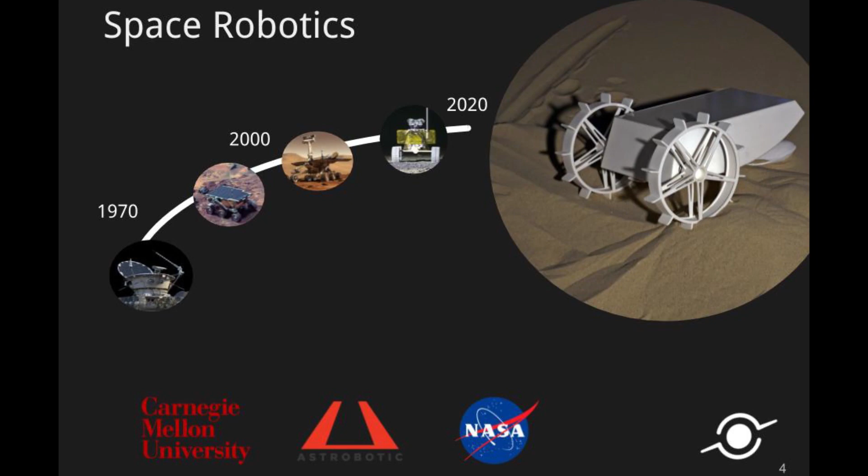So that's what Cuberover is for. It's a 2-kilogram rover that should be much more accessible to other universities and scientific bodies that want to be able to do science on the moon. And the Peregrine lander that you saw there is the delivery mechanism for that. This is analogous to the way that CubeSats have democratized access to universities and places like that for doing science in orbit.

And the difference between us and others that have come before is primarily that mass, which is what makes it so economical. But what we're demonstrating in this particular phase 1 is that we still can do science, useful science for people on the moon with that 2 kilograms.

I think more fundamentally, there's this really basic question about whether a 2-kilogram rover works at all. This is a profound challenge. It's not foregone. We're going to see in an hour whether anybody really believes it.

So the way that we're going to look at that is through a few different phases of the mission that it needs to be able to accomplish in this 2 kilograms to be a 2-kilogram rover. One is that it needs to get to the moon, right? So it has to launch, it has to survive the launch loading, it has to survive the transit to the moon, which in particular gets very cold, and it has to survive that drop deployment that you saw from the bottom of the lander, and it needs to actually rove around the moon. So those are the phases that you'll hear our different subsystems explain.

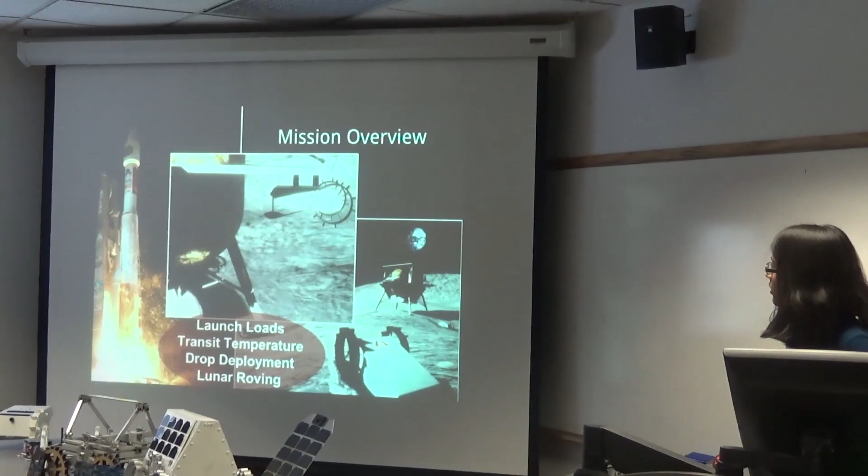On a broader level, there's a variety of different subsystems to this rover that you'll see. At a system level, we have an overarching group whose job is to manage the budgets and the margins between these two groups so that we actually produce a rover that can work on the moon. Those budgets are mass, which you'll see now, power and thermal, which will be discussed, and then the money itself. And we're ensuring staying on that schedule for the launch for phase 2 and coordinating between these subsystems.

To give you an idea of what else the systems team does, we're in charge of navigating the high-level requirements all the way down to the low-level subsystem requirements. It's a multi-tiered approach: you start with objective levels, which is the goal of the entire Cuberover program, then mission levels, basically rover launch operations, then systems, like the mechanical team, thermal team, avionics, science systems, and finally subsystem teams.

To give an example of what requirements for each tier looks like, we'll look at mobility. On the objective level, the Cuberover is supposed to provide power, mobility, and communications to a science payload—basically the Cuberover has to be able to do science. On the mission level, the Cuberover shall be able to move a certain distance.

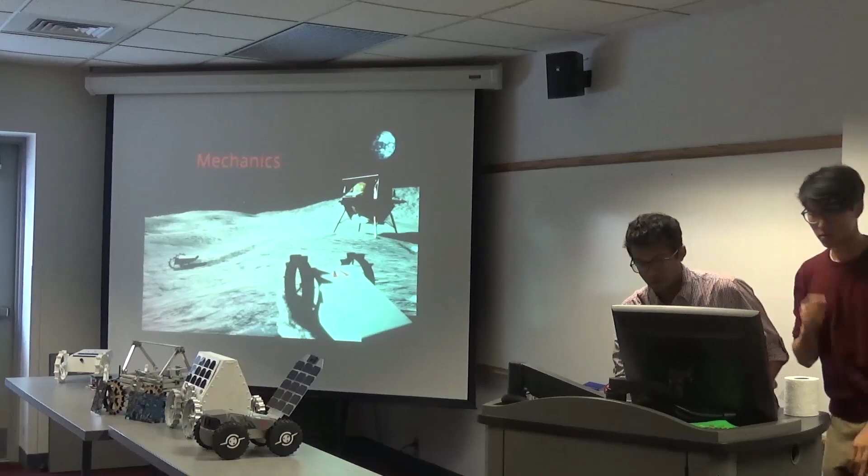For the Cuberover system, we wanted a simple yet robust design. We did a trade study on whether to have 2 wheels or 4, and since 3 points of contact is the minimal required for a stable system, we ended up going with a 2-wheel tail dragger. For mobility, we have 2 independently powered wheels, so to turn, one wheel would be turned at a different rate compared to the other.

For thermal, since heat transfer is either by conduction or radiation—there's no convection on the moon—the radiation would happen over the surface that's there, so we wanted to maximize the surface area to radiate heat out to space. For solar power, we need enough surface area to install solar panels so the sun can provide energy and we can recharge our batteries.

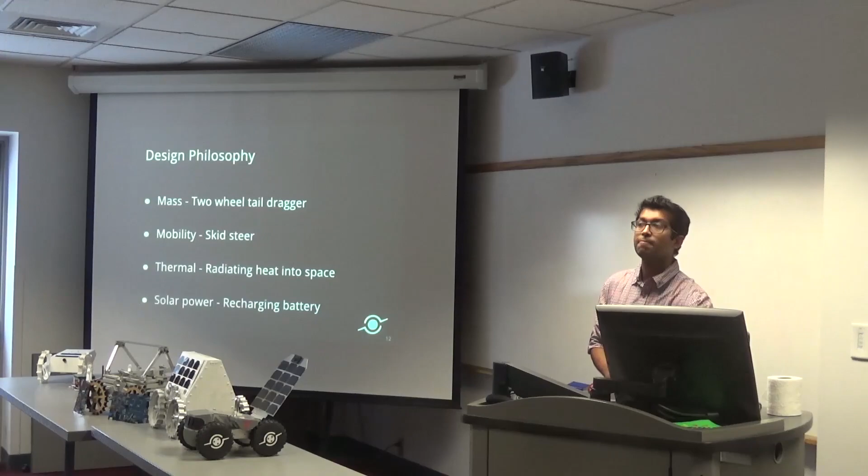Oleg: the primary philosophy behind designing the chassis for the rover is that it must be able to survive and thrive under the thermal environment of the lunar surface.

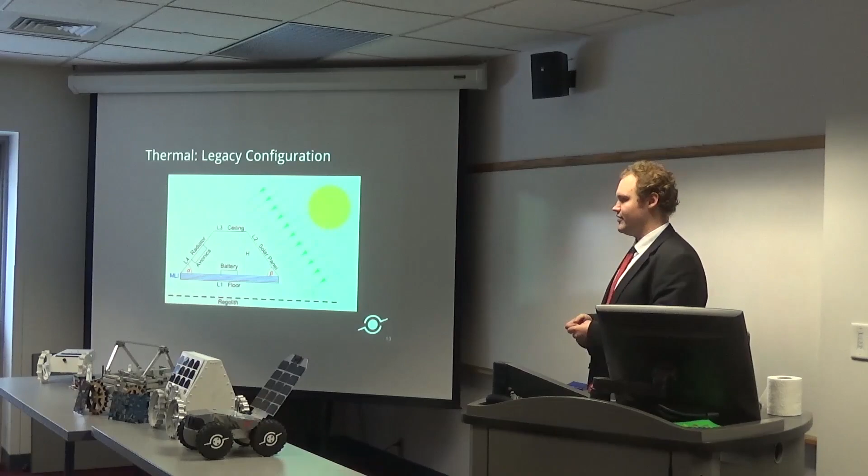In the legacy configuration developed in earlier semesters, we had originally envisioned a solar panel and a radiator facing opposite sides of the rover. That way the radiator would be protected from sunlight that would add heat, but it would be somewhat exposed to heat coming in from the regolith.

Under this condition we would have optimized our design to minimize the surface area of the ceiling. However, if we were able to increase the surface area of the ceiling, that would be the ideal location to place your avionics and declare it as your radiator.

When exploring the ideal configuration possible, under the idealized rover we would have a horizontal radiator that maximizes the view factor to open space and minimizes the view factor towards the hot regolith on the moon. Solar panels, if included, would ideally face away from the radiator so they don't re-radiate heat onto the radiator's surface and heat up the electronics bound to it.

We would like to isolate the thermal enclosure for avionics so that heat coming up from the regolith below the rover, and any heat collected onto the solar cells, is blocked out. This was the original concept for the idealized chassis configuration. This schematic shows the multi-layer insulation, which blocks out the majority of heat traveling through the floor and being collected by the solar panels, protecting the avionics in the upper section, which would be used only as an avionics containment box.

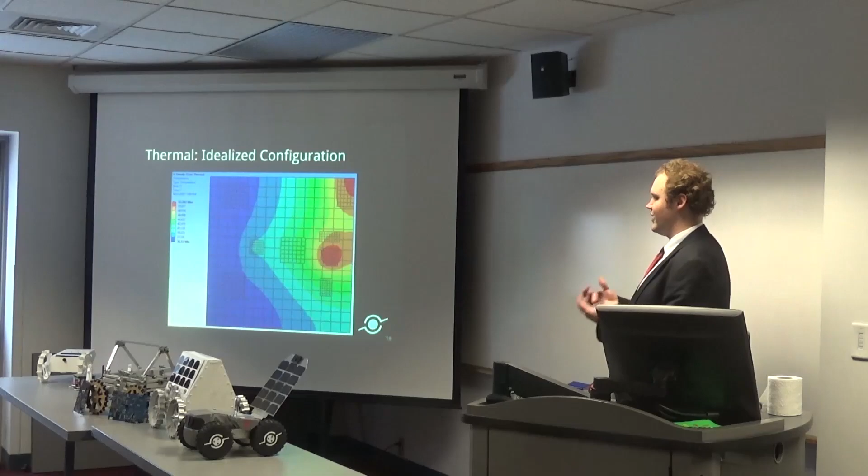If our maximum temperature limit for the chips was around 40 degrees Celsius, then we would not be able to operate at conditions of solar elevation around 45 degrees or higher. Using that, we predicted how the radiator and maximum chip temperature would depend on the power dumped into the avionics board by the complete set of electronics on the rover, and the angle of the sun above the horizon. This provides a cutoff for different modes of operation on the moon depending on how much power has to be dissipated by the radiator to open space.

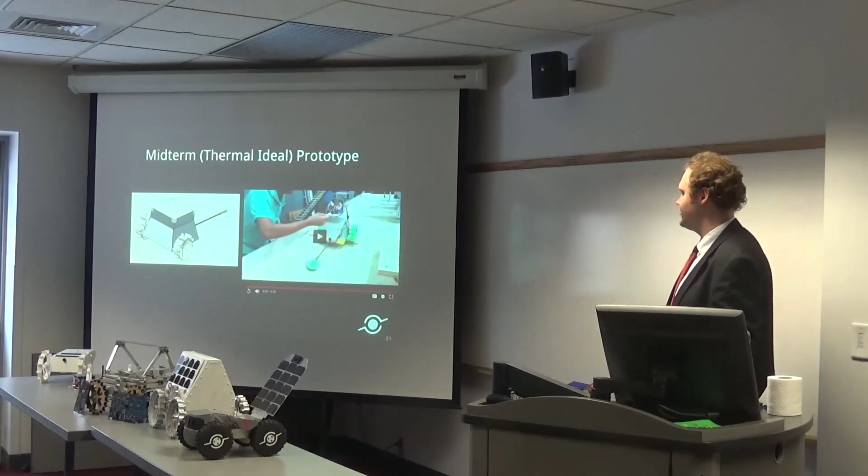The initial prototype, however, unfortunately resulted in too much weight, and there were issues with its ability to surmount obstacles. So when we continued development past the mid-semester prototype, we moved to a chassis with reduced mass, more optimized for climbing through very rough terrain.

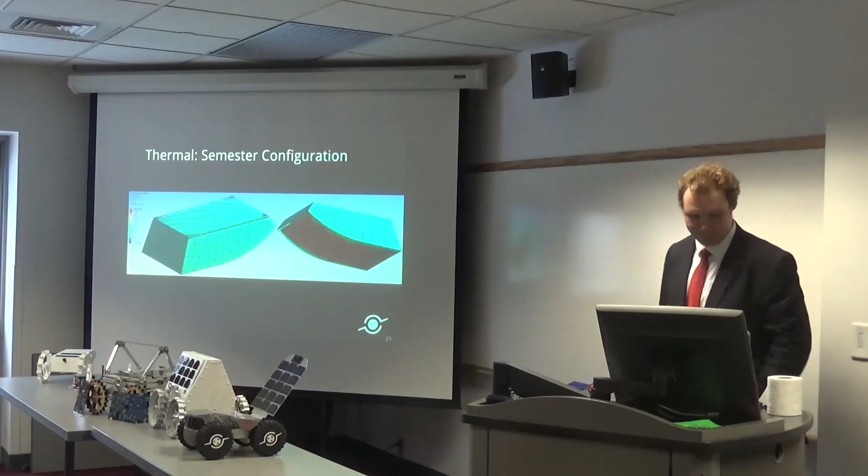Following the new chassis design, we ran simulations on ANSYS at ideal lunar conditions at a solar angle of 75 degrees. You can see the different heat signatures incident on the full body chassis of the rover.

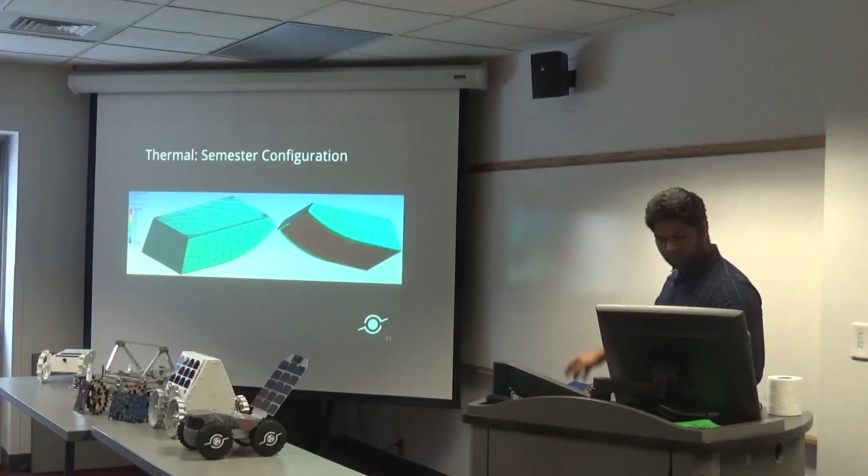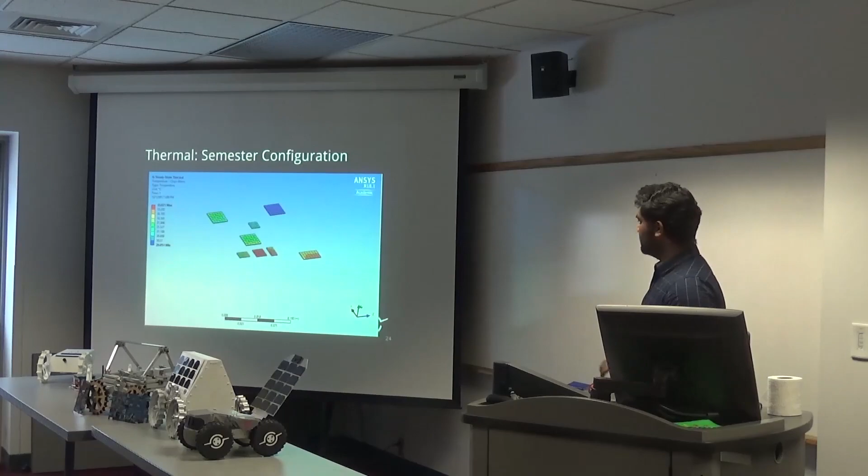The rover is only operable if the temperature of the radiator is between 0 and 40 degrees, so you can see the window there. At full power, the rover can be operated from about 28 degrees to about 85 degrees solar elevation and still be within range. At half power, the range moves to about 35 degrees to 85 degrees.

Quick question: when you say degrees, do you mean angle of elevation of the sun? Yes, sorry, angle of elevation of the sun. Another question: blue, is that idle or zero power on the CubeRover—what are the legends here? Blue is when everything is switched off, which would not happen at all, but we included it anyway.

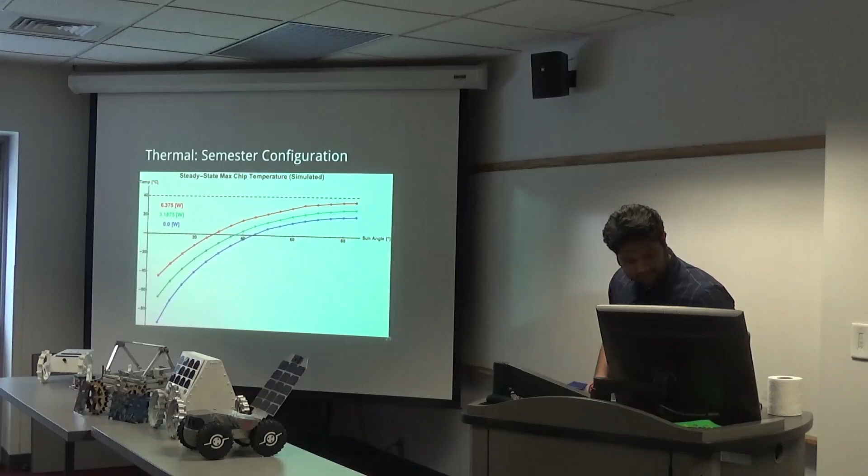This shows, at different solar angles, the maximum chip temperature experienced. You can see that at a solar elevation of 85 degrees, at both half and full power, we're still within range, so it would still work.

The limitations we faced with the current model are that we didn't provide a method for charging, like solar panels—if included, the heat inside the rover would increase. The second big limitation is that all simulations assumed perfectly flat lunar terrain, so we haven't accounted for rough terrain. If the rover is near large boulders, which are relatively hotter than space, the view factor of the rover toward the boulder would be higher and more heat would impinge on the rover.

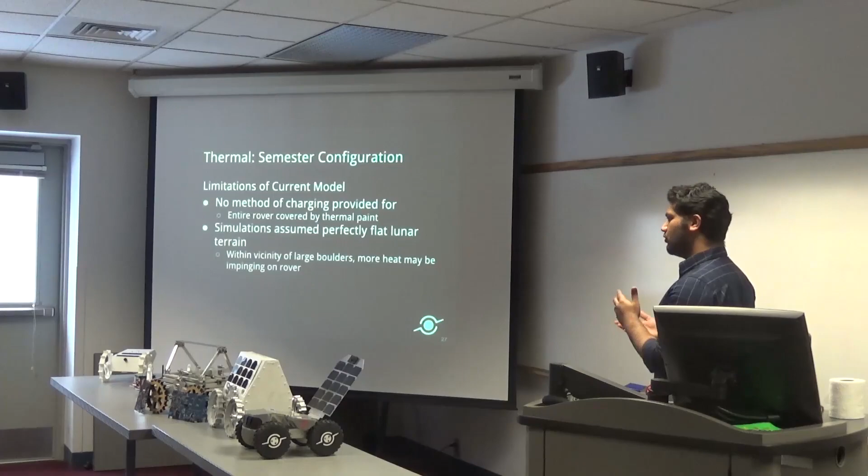If solar panels are included, the whole plot would shift upwards and the operation window would change. So though you would be able to operate the rover at lower solar angles of elevation, you would lose the ability to use it at higher angles.

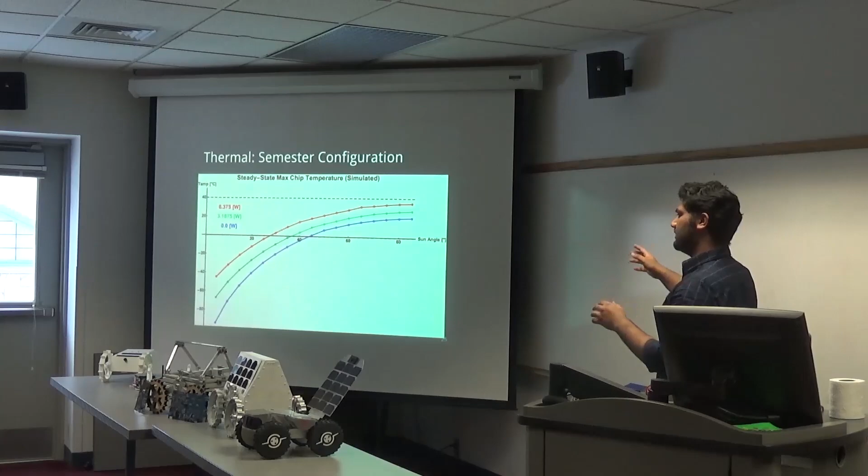Hannah's going to talk about the wheels.

Moving on to some of the component design, as with the majority of this rover, we are comparing and balancing some of the indicators of performance, in this case maximum surmountable obstacle and lateral flotation, against weight. Throughout this rover, we are often doing trade-offs between something that we predicted could perform better and something that needed to meet our weight standards.

So in terms of the wheels, we wanted to make them with the minimum possible diameter, minimum possible width, as light as possible, while still achieving our desired mobility standards.

Here you can see some data from a Chinese lunar exploration mission. This mission landed in one of the lunar maria. Maria comes from the Latin word for seas, and these are the planar regions of the moon, covering about 15% of the moon. They're called maria because early astronomers thought they were actually seas on the moon, because they're a little bit darker. But these are the flatter, more tame areas that have been the locations for most of the landings on the moon. This is where we hope to land with our rover.

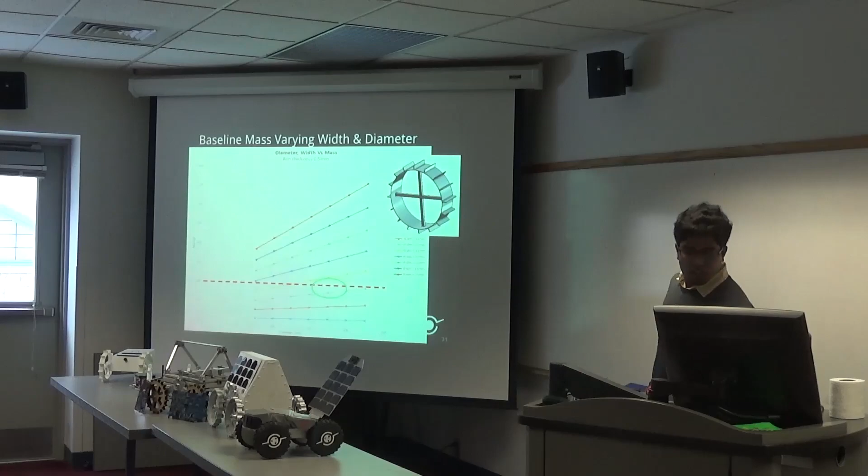We were aiming for a 100-gram weight for one wheel, and that's the green circle you'll see. Then we did another study for the same thing, keeping the diameter around double the obstacle height, and then we varied the width and the rim thickness. Based on these parametric studies, we decided on a width and a rim thickness.

As we improved the design, this was our first design with 4 spokes. You'll see every design being iterated based on these studies, but with different inside spoke designs and stuff like that. Then we did analysis throughout, whenever we developed a new wheel design.

What we did was a drop test, from 1 meter, on the lunar rover, and then we checked if it was safe or not, based on factor of safety. Then we did the same thing for mobility: if it stalls and the wheel gets stuck, what would happen to the wheel?

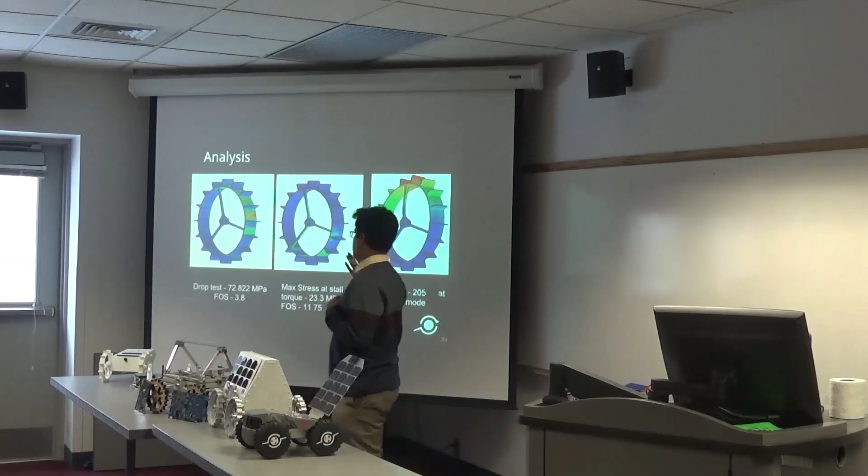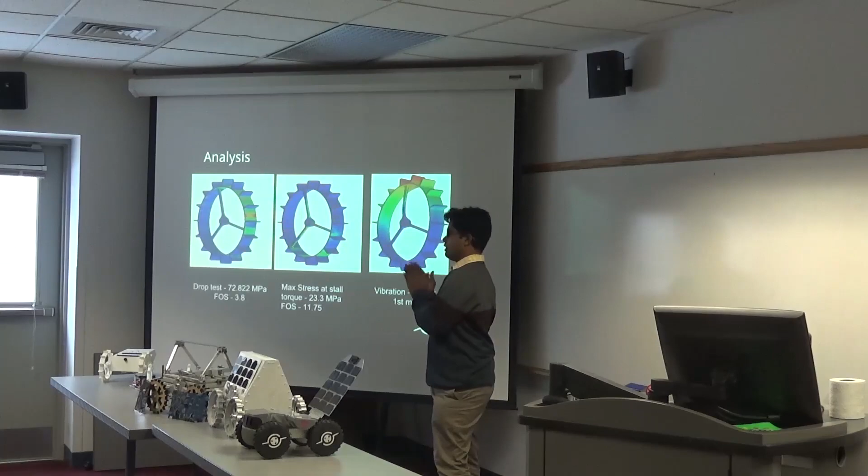So that's what you see in the middle, max stress, which again is a good FOS. For vibration, on the launch vehicle we checked that the envelope of frequencies was up to 100 hertz. So we took a factor of safety of 2, and then did vibe testing. The middle is fixed, and then 2 faces of the wheel are fixed, which is what we would need while it's attached to the rover, lunar pod, or vehicle.

Kushal will talk about the tail.

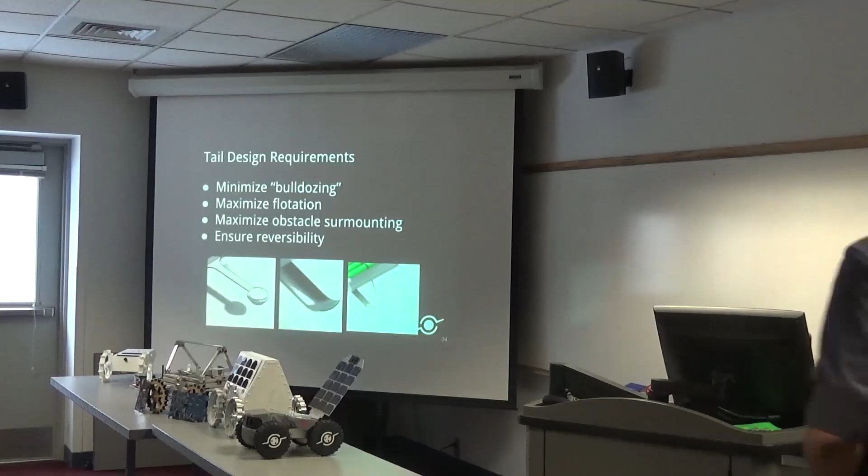So as we know we have a 2-wheel and tail system, designing the tail was part of the integral design, and there were parameters which influenced the structure, shape, and size of the tail. Our first goal was to minimize the bulldozing effect. The tail is the driven part - there are no motors connected to it, it just gets driven by the wheels in front. So we wanted to minimize bulldozing, thus reducing the resistance caused by the regolith.

Apart from that, we wanted to maximize flotation, meaning a higher area of contact with the regolith, which increases flotation. We also wanted the tail to easily surmount obstacles, because some previous designs had good flotation and bulldozing performance but weren't great at surmounting obstacles. We also wanted the tail to work well in reverse operations, since the Cuberover may have to go in reverse, and we didn't want the tail to sink into the regolith.

So in the 3 images at the bottom you can see the design iteration process, and now I'll talk about the final design of the tail and its features.

We start with the load-bearing strut at the very end. The maximum load coming onto the tail will be endured by the strut, and since materials are very good under compression, this takes the max amount of load. We've got a contact bulb designed to give a high surface area of contact, improving flotation. It has a lip at the end which helps with reversibility, and we've tried to make it as lightweight as possible.

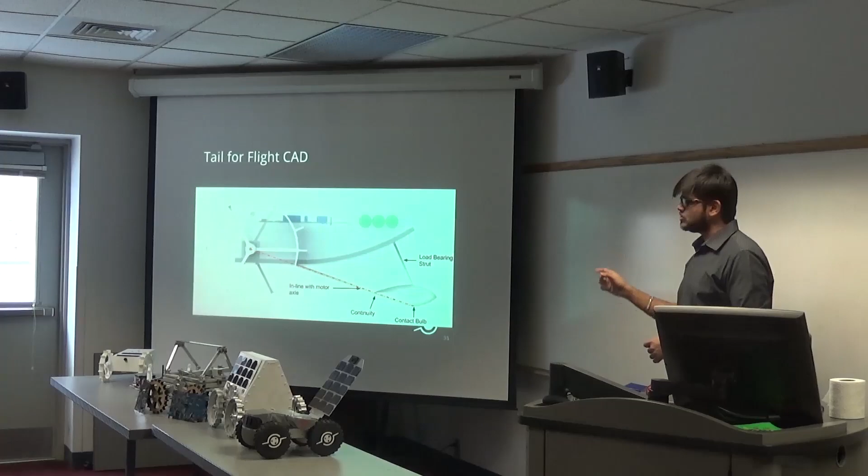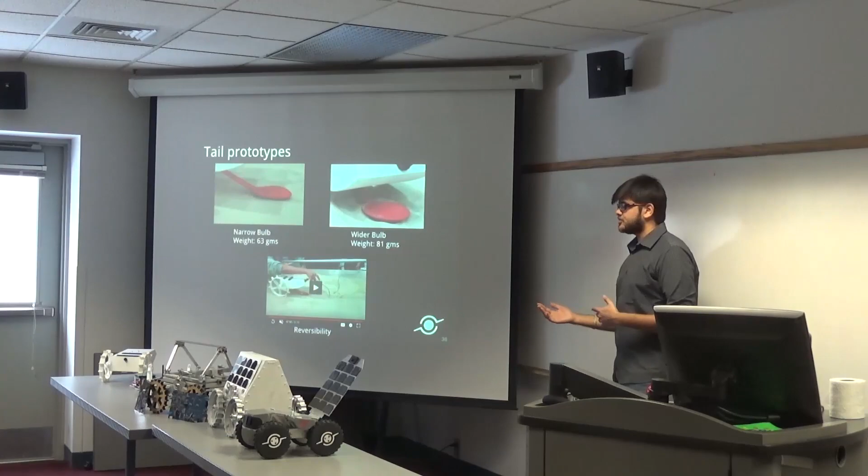We came up with 2 variations of the design, a narrow bulb and a wider bulb. At the bottom you see a video showing the reversibility of the tail, demonstrating it doesn't sink into the regolith. The two variations were to check whether increasing the surface area of contact significantly improves flotation and bulldozing performance, but the experimental tests were not very conclusive - this is an area for further study in future prototypes.

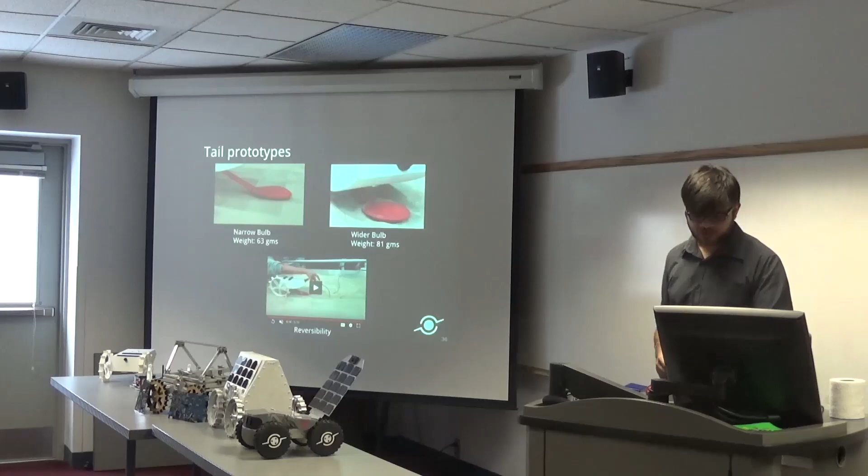As for the FEA analysis, we went with 3003 aluminum, considering it a better and more optimal choice for space grade aluminum over 6061. We did an initial vibe test to check the first natural frequency of the tail.

There were a number of possible maximum load conditions, and one of the loading conditions was that we have two fixed obstacles on either side of the tail, and the rover is trying to turn because the wheels are free to turn, but these obstacles are prohibiting the tail from turning. We checked whether the tail is strong enough to endure that type of loading situation.

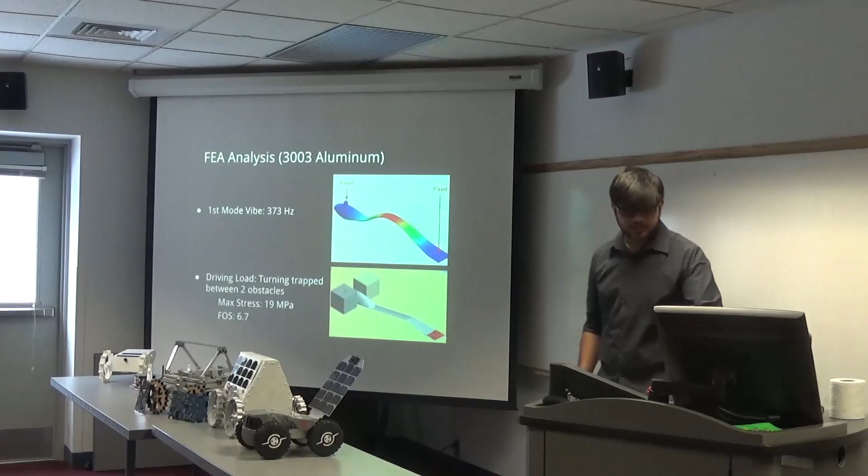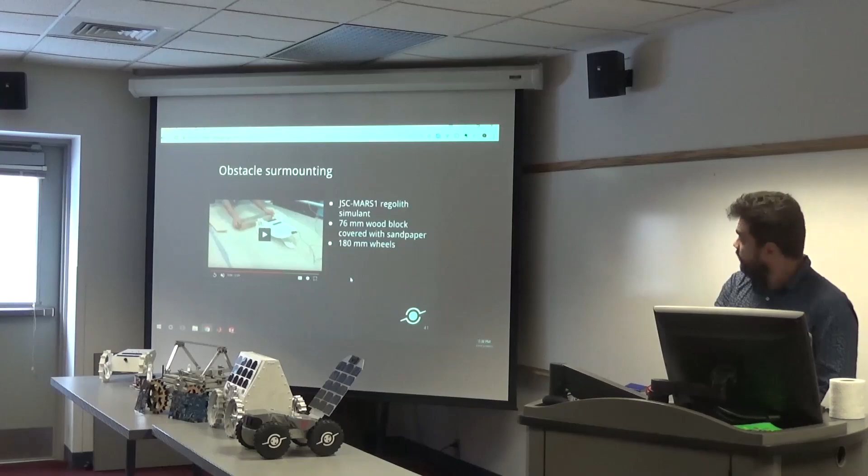Another test that we did for the prototype was a tip-over test. We did some analytical analysis and also experimental testing to see how they match.

The most critical directions of tipping are the front and diagonal direction. Diagonal means that the line between the tail and the wheel is the axis of tipping.

So the results were: back tip-over is pretty safe at 63 degrees analytical; front tip-over at 36 degrees, which matched the experimental result. The diagonal one is 35 degrees analytical and 40 experimental, which may be related to the issue with the step we had to install for testing.

After that we did an analytical calculation about what the angle of the rover would be after surmounting the obstacle and then dropping again to the ground. That angle is 16 degrees, and assuming we could be on terrain with a slope of around 5 degrees, we get an angle around 21 degrees, which is still safe for any of the tip-over angles.

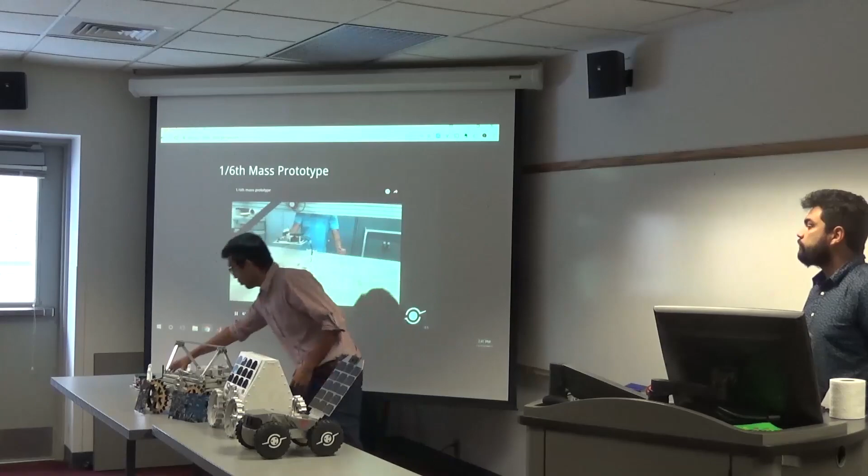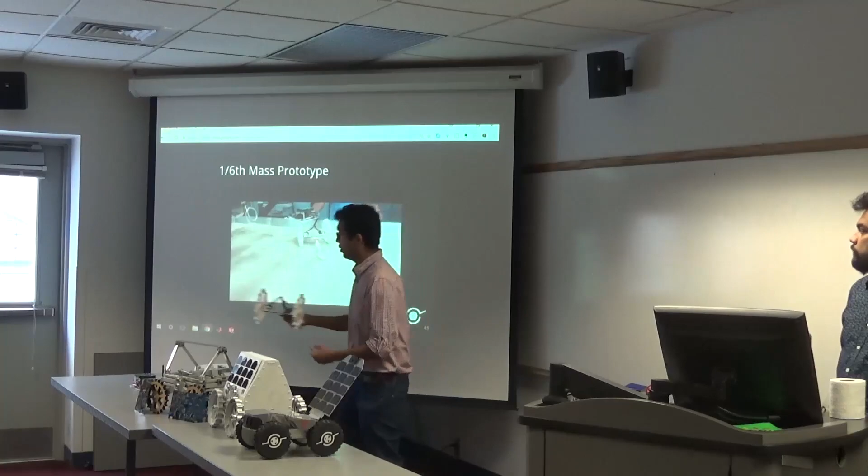Since the torque of the HD minis was low, we created a prototype that weighed 1/6 of 2 kilograms, about 333 grams, and put in two HD motors, two wheels and a tail, and made it drive, and it drove really well. This is a potential path to flight motors, but we would have to increase the reduction and get better torque. As you saw, this rover prototype ran really well. Can you run it again?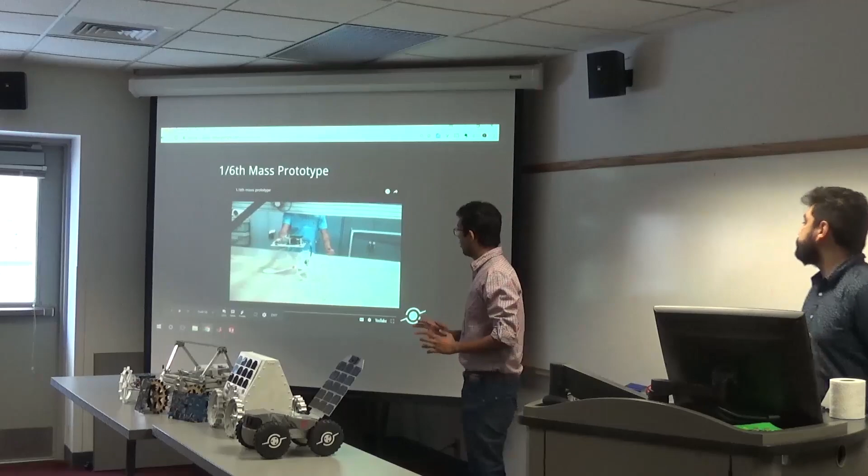You can see that the tail doesn't have a big bulldozing effect. It's not sinking while going forward or reversing, and even the wheels are hardly sinking. So our rover has a really great chance of working in lunar gravity, but testing these HD motors on Earth is not feasible with 2 kilograms, so we are speccing different motors that would provide higher torque to test the rover under Earth gravity.

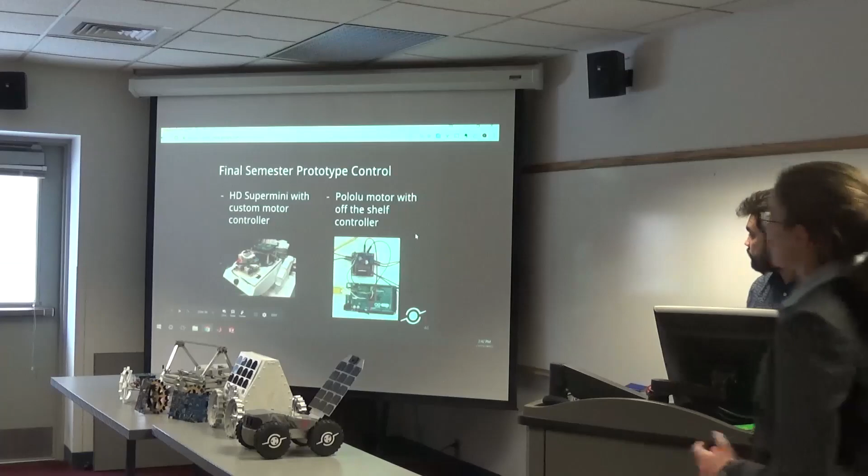In order to test our mechanical prototypes, we went through a couple different control methods. For the final prototype in front of you, we had two different control methods. On the left you can see a custom motor controller and single board computer setup. This was used so we could test almost all of our requirements without using the single board computer being developed by Avionics. This setup has two motor controllers that use CAN open.

Which can communicate with the motors, again without any of the SBCs that the Avionics team will discuss a bit later. In addition, this uses an Odroid computer that we could use to test some of the science aspects, including the camera. This whole setup was developed to test the mechanical aspects separate from the development of the Avionics team, which you'll hear about later.

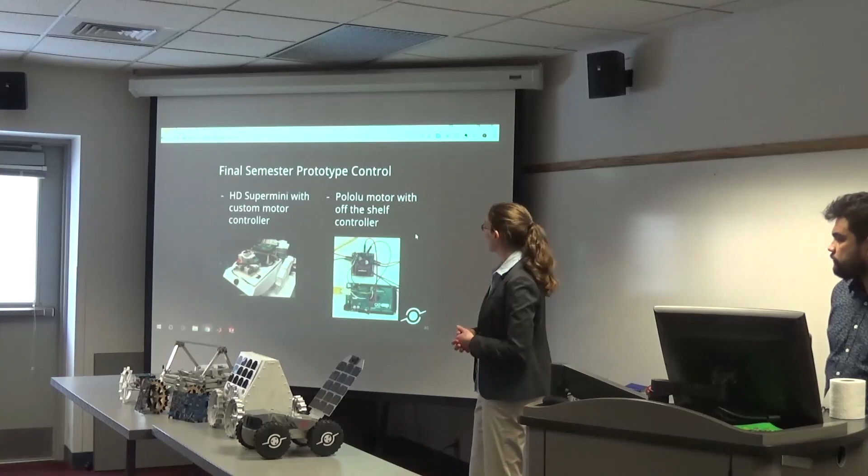On the right is a far simpler version that we use with the Pololu motors that Manon mentioned. This setup simply used an off-the-shelf motor controller that we could use to power two motors. In addition, we used an Arduino Mega so we could attach different sensors as we saw fit.

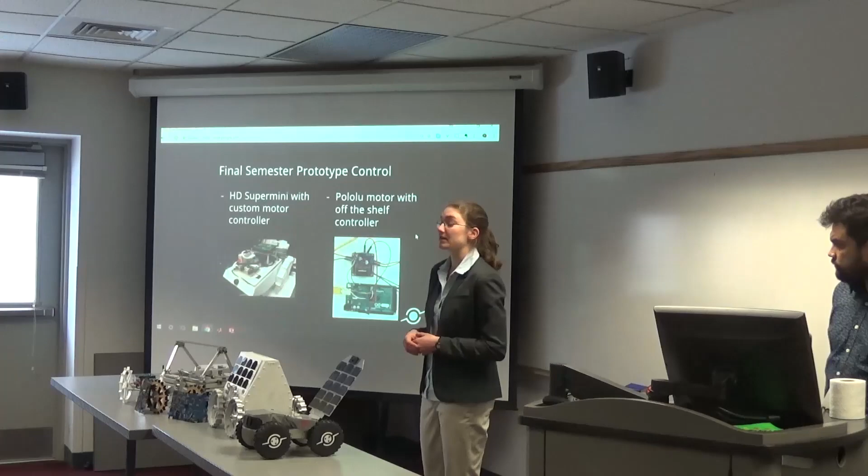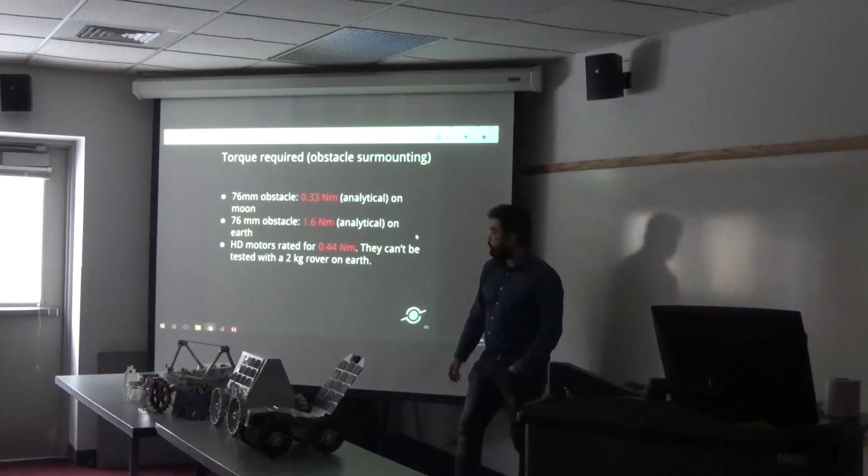As Manuel already mentioned, since the HD motors are rated for around 0.44 Newton meters, theoretically we can achieve this on the moon, but we cannot test those motors with a 2 kilogram rover on Earth. That's why we're trying to find new motors with higher torque.

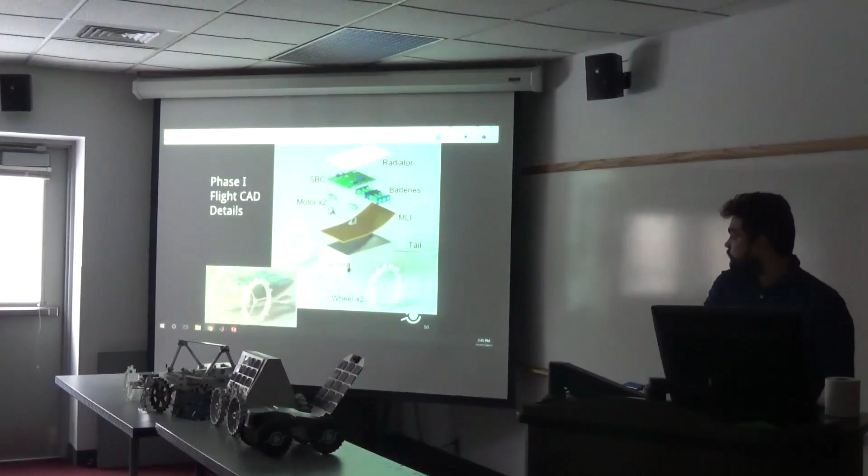So just to bring it all together from a mechanical standpoint, this is where the phase 1 flight CAD stands at the end of this phase. You can see some of the things we've already talked about: the new chassis shape for thermal and mass reasons, the wheels we've discussed, the baseline grousers and the radius coming from the obstacle heights, the tail with its struts for loading and continuity going over obstacles, and some things we have not discussed yet because, while we know they are needed, they haven't been developed in phase 1 — they're mostly a phase 2 issue.

MLI is used for thermal insulation from getting heat from the regolith. The batteries and the SBC, which the avionics team will talk about, are mounted directly to the radiator, so they're thermally sunk to it and can radiate out into space. There are also the two motors we've discussed changing specs on, and the camera, which the science team will cover. You can see the field of view on the front.

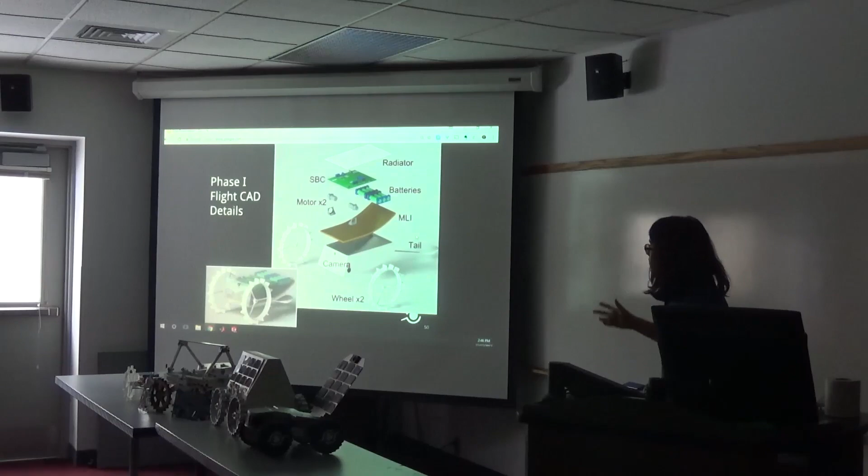As we continue into phase 2, we'll further develop this flight CAD and figure out specific integration, specific design for manufacturing, and then testing and final assembly.

More broadly, there are a few specific phase 2 tasks that need to be done in mobility. One is to continue investigating different wheels. We've made several more wheels than we've tested, particularly WEGs, which are wheel-legs - essentially missing rims - that should be examined for testing in phase 2.

Wheel refinement is needed, both on a performance level and a mass optimization level, in terms of changing spoke geometries, potentially looking at compliant spokes with curvatures or dual spokes for stiffness, and changing grouser shapes, which we've discussed a little. The baseline is just straight, but there's potential for chevron shapes or other designs whose impact on the mass of a CubeRover we don't yet know.

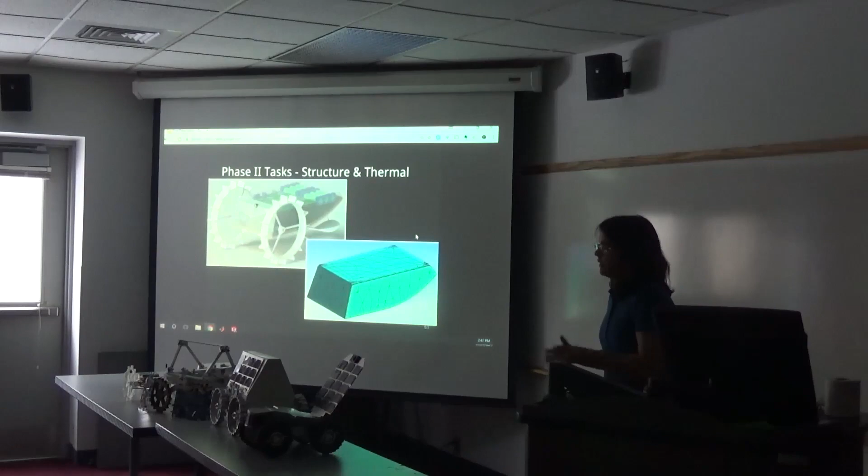Another phase 2 development is further refining the thermal model and the structural chassis that goes along with it, both understanding design for manufacturing issues and integration with other subsystems, and how they affect performance and thermal issues.

One thing you haven't seen since the video at the beginning is that we need to drop off the lander platform onto the ground. That's a major load case for this rover - we need to make sure we don't tip over, we don't break, and that we can survive launch mounted to that platform and yet release cleanly. Some work has been done understanding that we're in a good tip-over envelope for the basic chassis geometry we have, but actually specifying the operations and specific components for that is a phase 2 issue as well.

The last one here, which is most important but happens at the end, is understanding design for manufacturing and actually getting all of those things in-house, getting them assembled, getting them tested, and then sending them on the rocket to the moon.

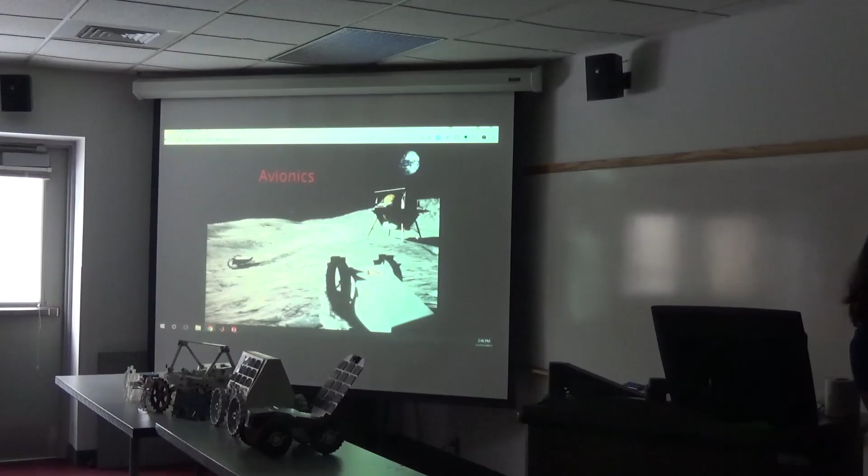Very broadly, the avionics team was responsible for the software, the hardware, and generally all the electronics on the actual rover itself.

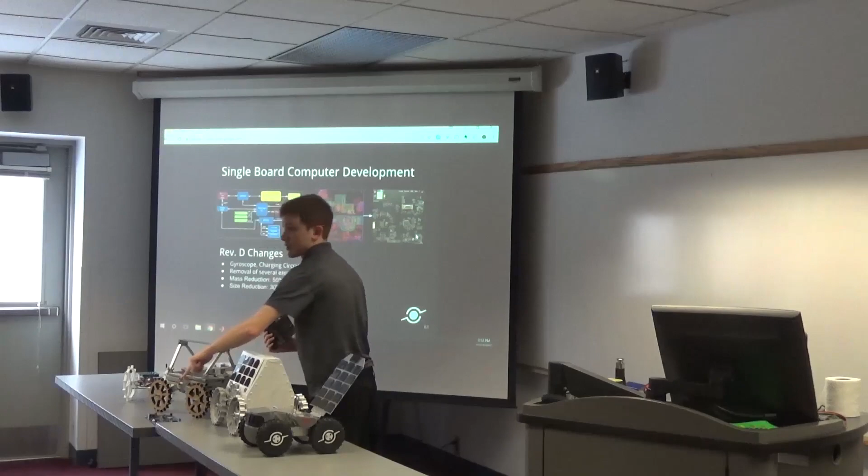So we accomplished this by removing several extraneous parts. On the RevC design, there was an extraneous Hercules microcontroller, which we determined would no longer be necessary, and a lot of power components were removed as well.

The first thing we directly changed was the gyroscope, which was altered because it was found to be non-functional. When we tried to test the gyroscope that was on the RevC board, we found that it did not respond. It was not able to be interfaced with SPI, which was an oversight from the previous iteration. This was fixed for the new edition of the board.

We also found that one of the charging chips on the board for getting power to the rest of the components from the batteries was not actually the right chip. So we researched and replaced it with a new chip as well.

Okay, so like Jeremy said, we basically focused on primarily streamlining the RevC design, making it fit that 15 by 15 centimeter radiator plate. One of the biggest challenges was just getting the components to work. There were a lot of pitfalls encountered in RevC, and basically the first half of the semester was spent addressing those and fixing those problems with the gyroscope, with the radio, Wi-Fi chips.

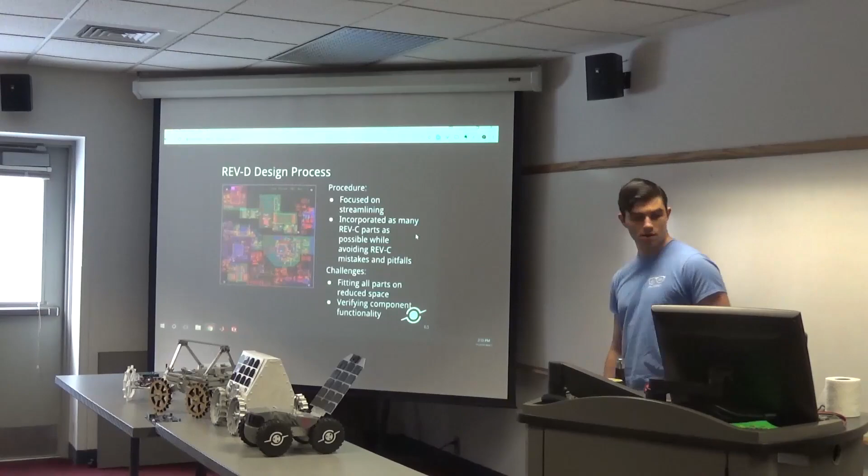And so one of the important ideas of RevD, and really of CubeRover this semester, is the idea of customizability. It's more of a platform than it is really just a single mission rover. It's meant and designed to be able to carry customizable payloads and to vary what missions it's able to go on.

So the way that we looked at that from avionics is, even though the reduction in size was pretty drastic, we still found that we have about 20%, about 1/5 of the 15 by 15 centimeter RevD board space that is still available to support putting on other kinds of chips that are specific to mission and specific to sensor payload, which is a really important idea in designing for customizability and variation.

After the design was finalized for Rev D, we sent out the design and got 5 PCBs back. We used a reflow process to solder at least one of the boards. One of them is done, so now I have to test it for correctness and compatibility, and make sure there's no shorts.

As Jeremy mentioned earlier, one of the main problems we had this semester was with the gyro. It measures the angular velocity of the rover, and together with the accelerometer, it can tell the orientation of the rover. For some reason it had a hardware error that caused it to not initialize and report zeros back all the time. We replaced it with a new gyro, and initial testing has shown that it works, but we need to do more complete testing to make sure it works in all cases.

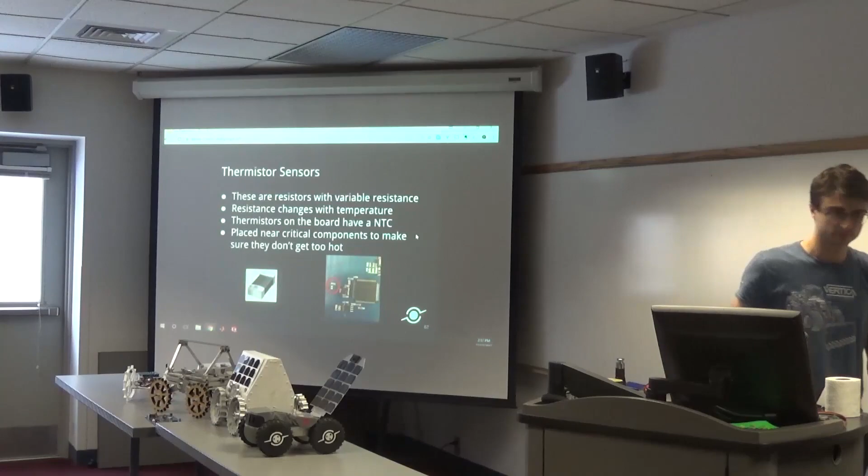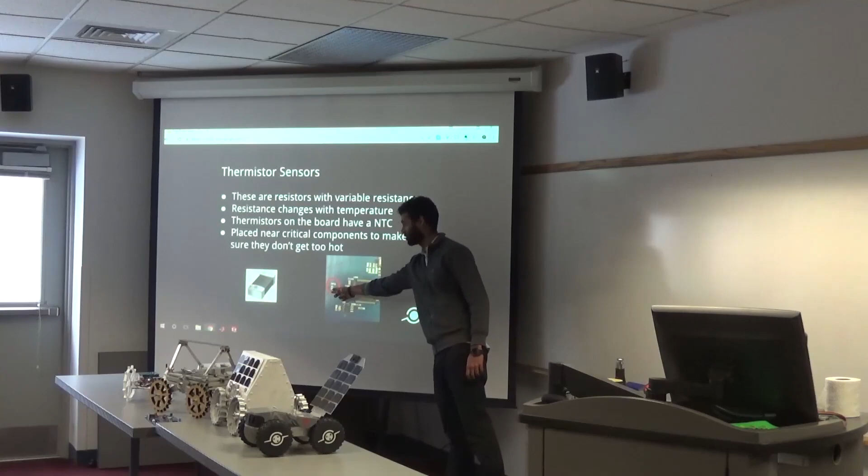Another part of the sensor package is the thermistors. For those who don't know, they're basically variable resistors whose resistance changes as the temperature changes. The thermistors on the board are NTC, meaning negative temperature coefficient, so as temperature increases, resistance decreases. They're placed near critical components on the board, like the Hercules microcontroller we're using on the Rev C, and there's a thermistor right there, which is very small. We measure the temperature to make sure nothing is overheating.

The thermistors had a data sheet which provided a mapping for every 5 degrees of resistance to temperature. We plotted this curve. Basically, the microcontroller reads an ADC value, using the ADC converter to read a value for resistance, and then we use this curve to convert it to a temperature and get useful information out of it.

We also did a characterization, though it's not really visible here. I guess I don't know why the curve isn't showing, but from the characterization we can see something. Let's just draw the shape.

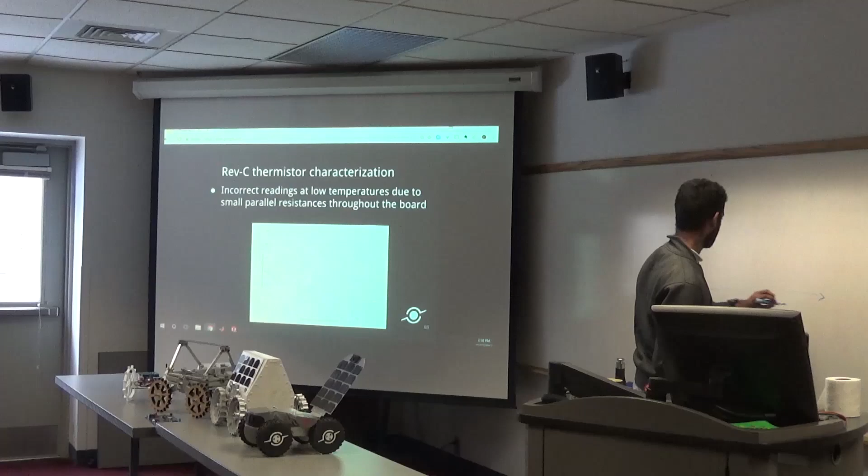So we have measured temperature on one axis and actual or expected temperature on the other. That's what the curve looks like, it's kind of squiggly at the bottom. Ideally it should be a straight line with a one-to-one correspondence, because that is what you would expect.

But at low temperatures, we don't see ideal behavior because the Rev C had issues with leaky resistances that were very small and ended up being in parallel with the resistors. At lower temperatures, we'd expect a much higher resistance than we see, because these small resistors would bring down the resistance significantly since they were in parallel. Ideally these should be fixed on the Rev D because all the wiring was changed.

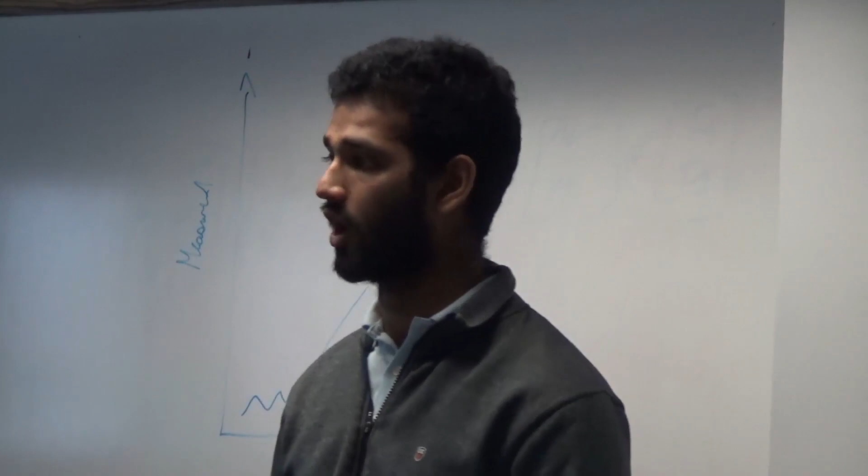Another thing we had to work on was the battery module. Initially this was placed on the Rev C because we weren't sure whether we'd use solar charging or not, but now that we know we aren't, the main purpose of this module is to do cell balancing, ensuring all the cells in the battery are at similar voltages. Initially on the Rev C, there wasn't the right chip on there, it just fit the footprint but wasn't actually a charging chip. So we had to reorder a new charging chip, put it on the Rev C, and test it.

When we tested it, it didn't actually work because the Rev C had faults in the wiring from the power to the charging chip. So we created a new board with this new charging chip and tested it by hooking up an Arduino to the charging chip. The Arduino supplies 5 volts, we stepped that down to 3.3 volts and plugged that into the charging chip. We were able to read voltages from all the cells that were connected, so we could measure them and see if one cell was too low, and do cell balancing to ensure all the cells were the same.

The issue with cell balancing was that we tried to do writes to the charging chip, and that didn't work, even though the Arduino never gave an error, and we saw a signal going from the Arduino to the charging chip using an oscilloscope. So a future thing to fix would be figuring out why that signal, when sent to the charging chip, was never actually received.

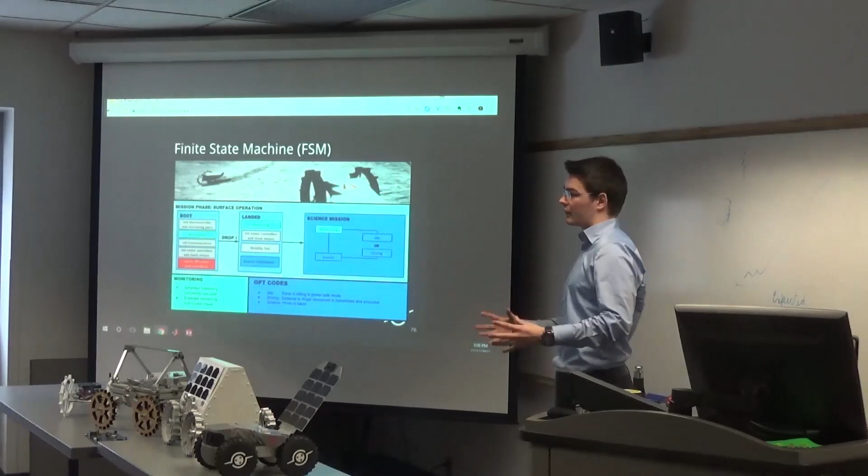And for science, we want to say take pictures, maybe in a different resolution, to perform our science on the move. So future work, it's not done with just making a board. A board is something good you can see, and it's a great achievement for the semester, but there are a lot of components we have to further test.

First thing is we have the MSP430, which is basically a chip which controls the board, which can switch on different components. We have to program the code. We're currently working on that to switch on the different board components and switch on the Hercules in order to get the board running.

As you've seen, the gyro code already worked. We just have to implement this new gyro code for this board. Then it's all set up.

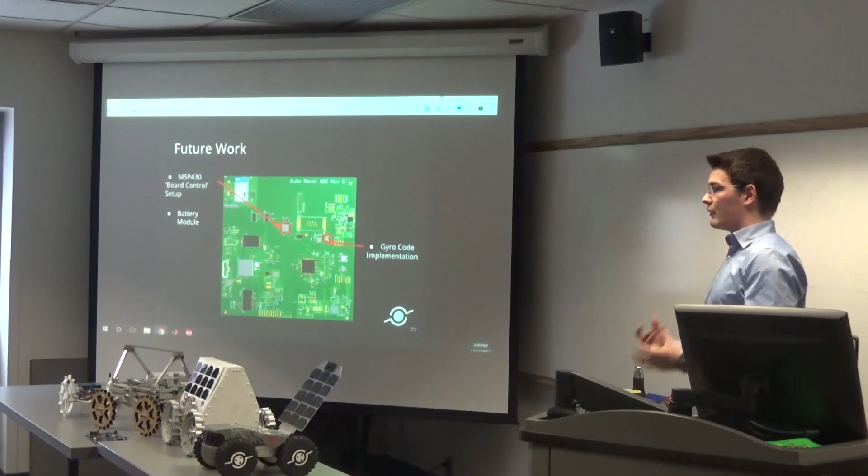For the battery module, we have to figure out how to do battery balancing. This is a really important thing which has to be done pretty soon. We also have an RS422. This is basically just a connector, which is simulating a connector to the lander, where we have the opportunity to send signals from the lander to the rover. This was, for example, like if there's an input signal coming, then please shut the whole board on.

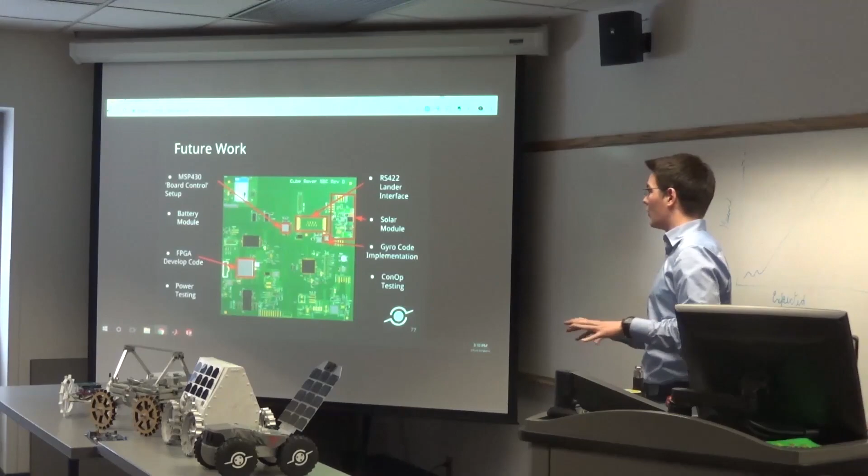We also have the solar module still on the board. If we want to do something with solar power next semester, the option is there, but it has to be tested. We also have the FPGA, for which we need to develop code and see what we can do for our science mission with this component of the board. Then there's power testing and ConOp testing: what components do we need, what happens if we shut off several components, what is the power draw still. We want to verify what's going on in this board.

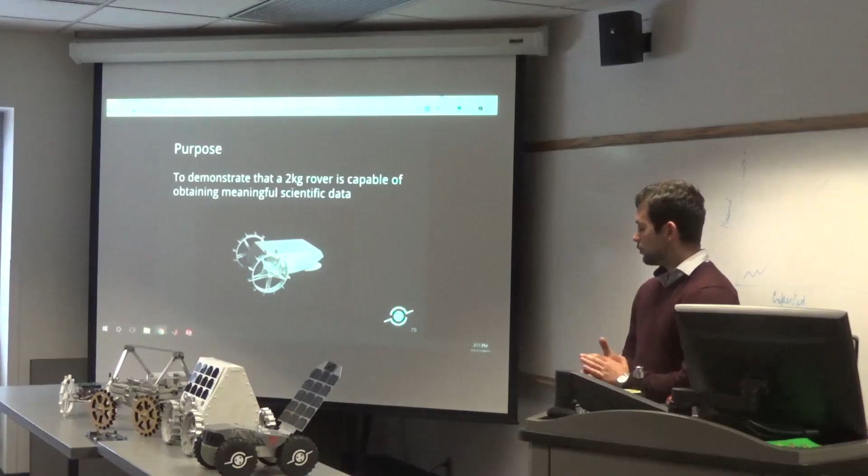The mission of the science team this semester has been to answer the second most important question of the project, which is not only can we build the rover, but can the rover gather scientific data that is meaningful?

To determine this, we used NASA's posted strategic knowledge gaps as a guide, which are questions NASA wants to answer to improve its current designs and future missions. We also have to keep in mind our current constraints: we're building a 2-kilogram rover, and it has to use an apparatus hopefully under 100 grams of mass and under 0.9 watts of power. It also has to be effective on the moon, and if we choose an apparatus other than a camera, we're adding mass where we could perhaps answer scientific questions with only a camera.

These are some of the strategic knowledge gaps feasible for a CubeRover. We could study the distribution of hydrogen species and other volatiles on the moon. We could study lunar dust remediation, technologies that allow the rover to function and mitigate damage caused by regolith, surface features of regolith, the electric and plasma environment, as well as surface trafficability and blast ejecta phenomena.

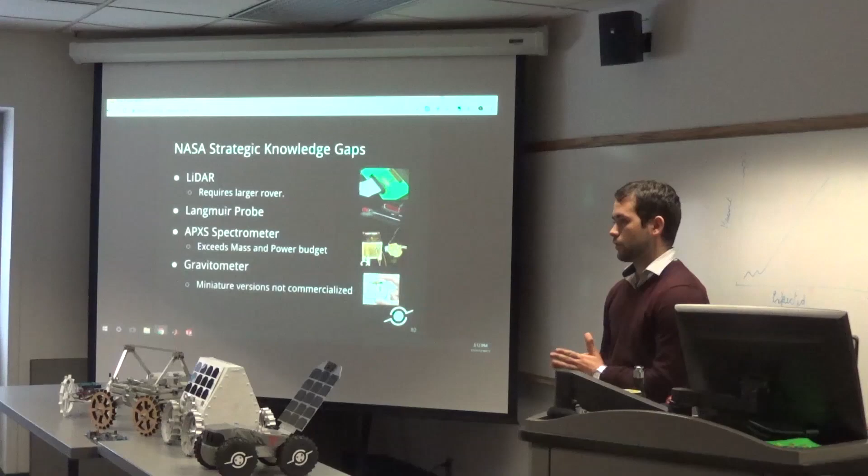We did trade studies on different devices we could use to study these questions, and in most cases found they were either too large or too massive for our constraints. So we decided to maintain our current setup with only a camera, while leaving enough space to accommodate some kind of payload if we wanted to answer other questions in the future.

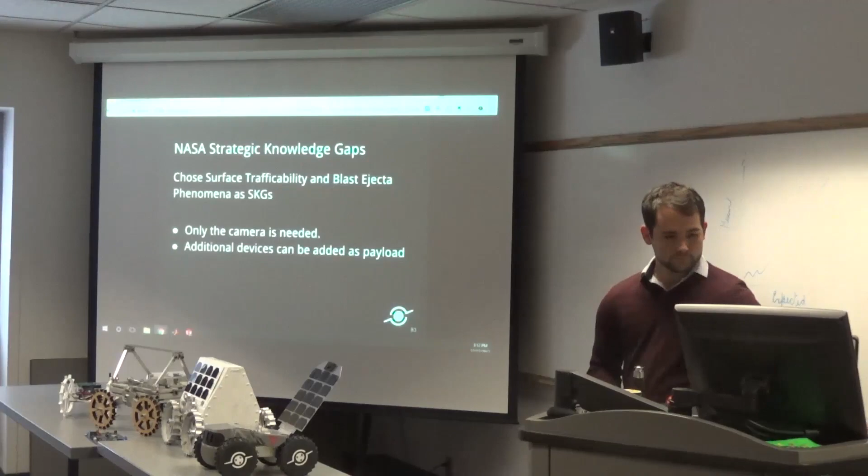Our goals are to focus on the last two SKGs, which are trafficability and ejecta phenomena. We want to know whether near the lander there are patterns or different levels of regolith that we can study, and further away from the lander whether we have issues with trafficability and how often we find obstacles that we cannot surmount.

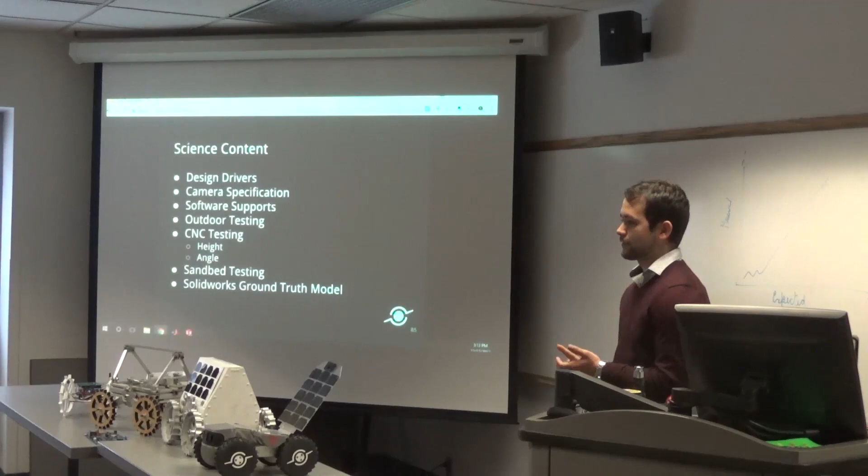Today we will discuss all the different types of testing we conducted. We conducted tests outdoors to measure the quality of our camera. We conducted tests on the CNC, which allowed us to change height and angle. We conducted tests on a sand bed to see soil features that would match regolith, and we also did a comparison with a SolidWorks ground truth model.

Our drivers are accuracy and feasibility. We want to know whether it is possible for a camera of this type to detect differences in soil constitution and general soil features, and also how accurate our images can be.

In terms of software, we used SolidWorks to create our computer model of the scenery we were studying. For the CNC testing, we created a SolidWorks model of every obstacle we had, and used eCamView to take pictures, Visual SFM to put those pictures together and create a point cloud, and then MeshLab to compare the point cloud to the CAD model.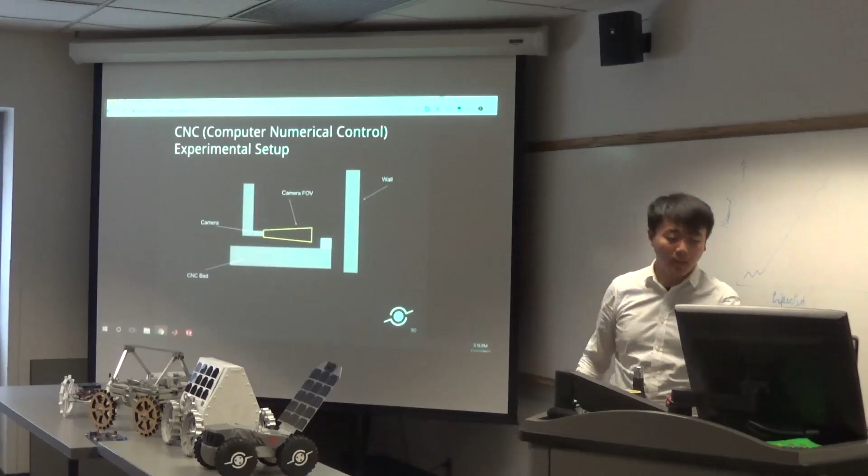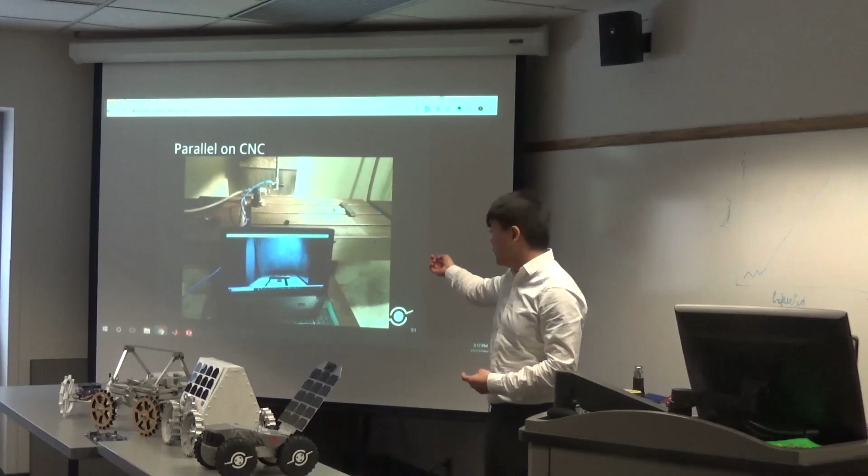So here is the image showing the actual setup for the CNC testing. You can see the target object we want to reconstruct is the parallels. We set up the parallels on the right of the bed in a specific layout with known dimensions. We attached the camera to a fixture we made with a 0 degree setting, attached that fixture to the CNC machine, and moved the CNC bed toward the parallels to take pictures.

The way we collected the image data: we have 4 parallels, and we vary the height and the angle. We move the CNC bed along a 25 centimeter pathway to take a picture every 0.25 centimeter, so in total we have 101 images for each iteration.

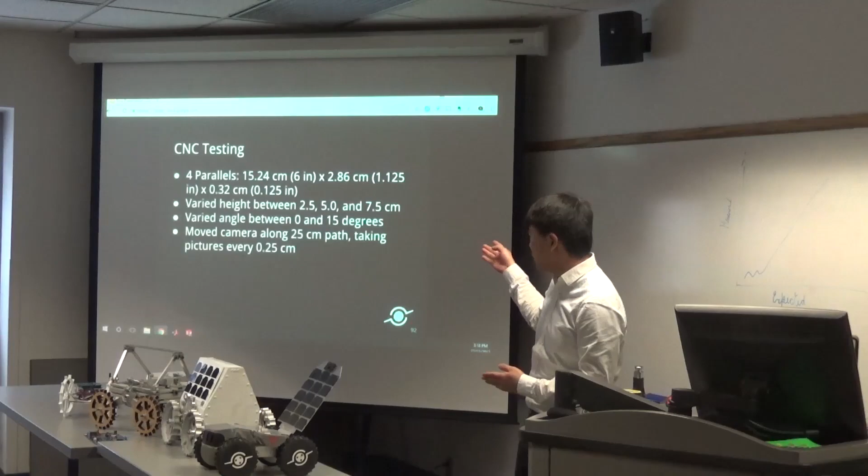We designed the height between 2.5 and 7.5 centimeters to meet the mechanical design requirements. We also picked 15 degrees because we know the field of view for our lens is 68 degrees. We want to use our camera for both navigation and reconstruction. For a better reconstruction while still doing navigation, we want our field of view to be about 20 degrees above the horizon. That's the angle we think works best for our application.

In order to quantify our reconstruction model, we created a ground truth model in SolidWorks. Basically what we did here is use the point cloud from the reconstruction model to compare against the point cloud from the ground truth model in SolidWorks.

Here's the testing result from the CNC machine. As you can see, we have 3 reconstruction models. From the result, we can visually tell that all the testing at 0 degree does not have valid results, because we can barely see the shape of the parallels. So we decided to use 15 degrees. From the view, we can tell that the 7.5 centimeter height gives the best model we can get from this testing, but we still wanted quantitative results to verify this.

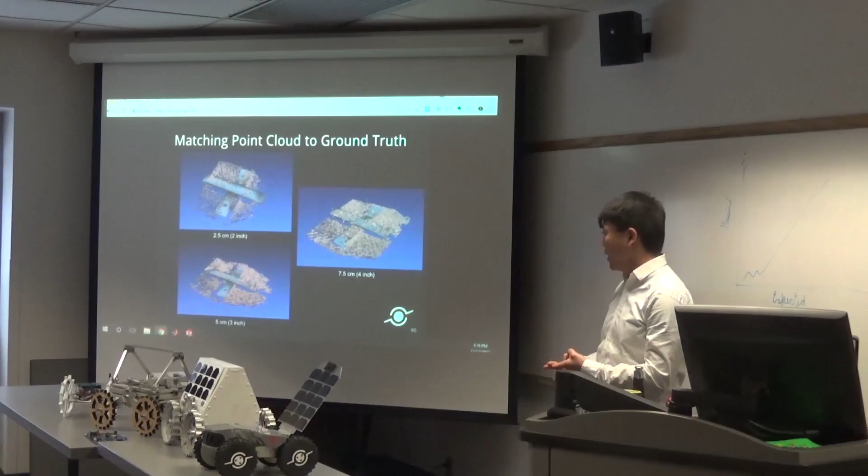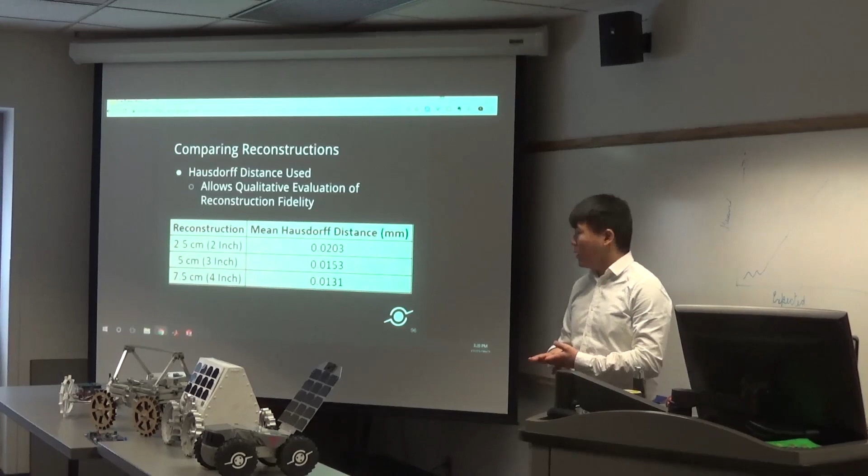So what we did here is match the point cloud from the CNC testing to the point cloud of the ground truth model, to see how close each reconstruction model is to our ground truth model. The algorithm we use to calculate this closeness between the two models is Hausdorff distance. We take the mean of the Hausdorff distance of each data point between the ground truth model and the reconstruction model. The lowest mean Hausdorff distance we calculated is 0.0131 millimeter, for the 7.5 centimeter above ground reconstruction. This quantitative result matches our visual result from the previous slides.

Once we had the best optimal angle and height determined, we moved forward to the next testing: the sandbed testing. The purpose of this is to see if our camera can do reconstruction in a better representation of the lunar surface, so we put some features in the sandbed here.

As you can see in the picture on the left, the rocks mimic the obstacles we might have on the lunar surface. The gauge block is an object with known dimensions, so we can use it as a reference. The parallel in the middle is 0.86 millimeters, which is thinner than the top layer of the regolith.

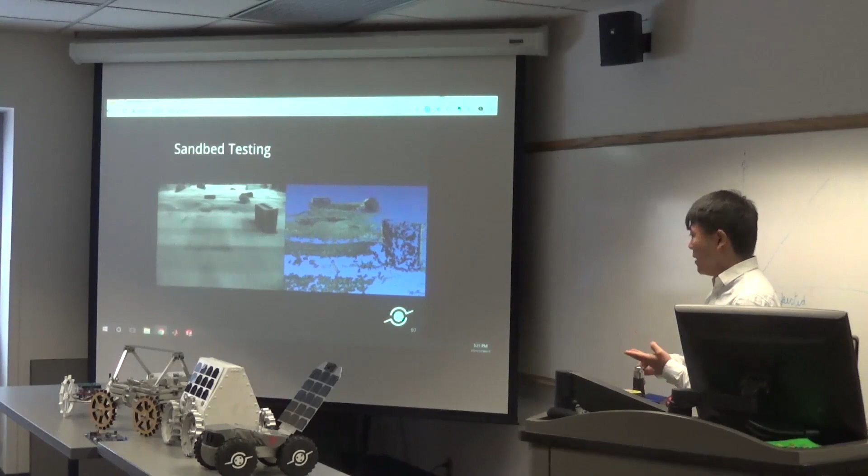We want to see if we can pick it up. The result on the right of the picture shows that our camera can pick up the parallel that's even thinner than the top layer of the regolith. This result helped us to prove that our camera does have the capability of doing a science test.

Now let's talk about the future work and conclusion of our work. As with every other subsystem, there's more that we can do in phase 2. For the camera reconstructions, we can improve and expand the testing we did by adding more height and angle tests, testing various exposure time and brightness, which we played around with a little but not too extensively. We can also test the quantity of images needed to create a very good reconstruction.

In addition, we are planning to investigate and test other science instruments, some of the things Fernando mentioned earlier. For now, our recommendation to the mechanical team was that the camera should be placed about 4 inches, which is around 7.5 centimeters, above the ground.

What, 10? Your conversions are all wrong. Are your inches right or are your centimeters right? Inches should be right, so 10. My apologies, that should say 3 inches. Your other slides are wrong too. Well, my apologies for that. No, the 4 inches is correct, sorry about that. And the angle is at 15 degrees. Yeah, no, you're right, it should all... the 2.5 should all be 5. 7.5, yeah, should all be 10. Okay, my apologies for that. And then I believe Systems now has something that they wanted to say.

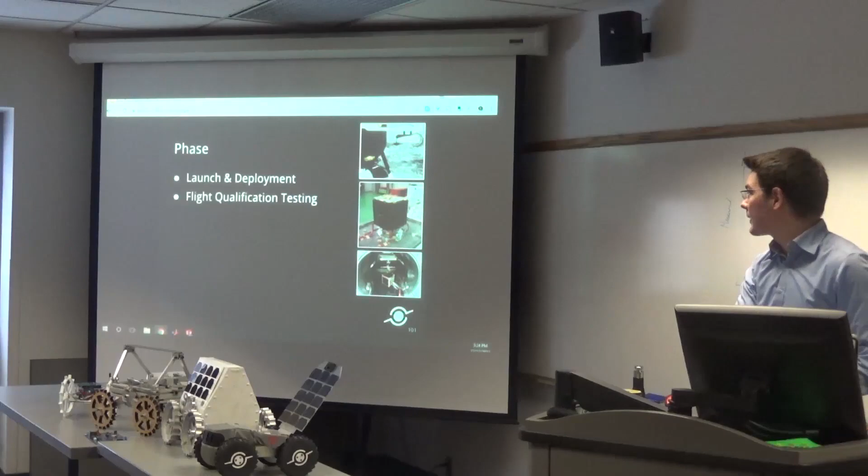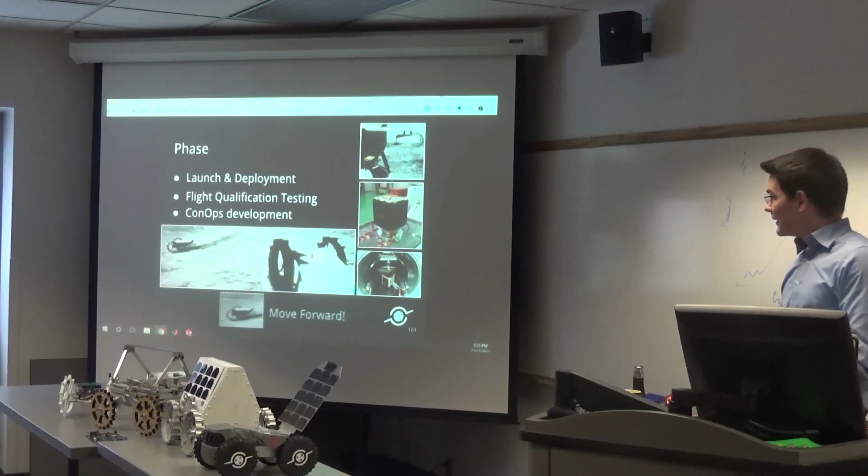And of course, we have some concept of operations. We want to see, can this really work—can the software and the mechanical parts all work together? We want to see this rover moving forward. Finally, I hope you all believe in it, and we've given you a good impression of why this rover should be feasible and what are the challenges to make it feasible.

At the end, I have to say there was a lot achieved this semester throughout in science, in avionics, and mechanical - looking at regolith, designing the wheels, making a tail, making this whole assembly, making a final board. Thermistors are also important, and having a thermal design. So we want to say thank you, and I think that's a great achievement for making this rover possible. We have to thank Astrobotic for their help, coming to us and answering our questions. Of course, we thank Red for giving us a lot of advice on how to design a rover, and Carnegie Mellon as well.

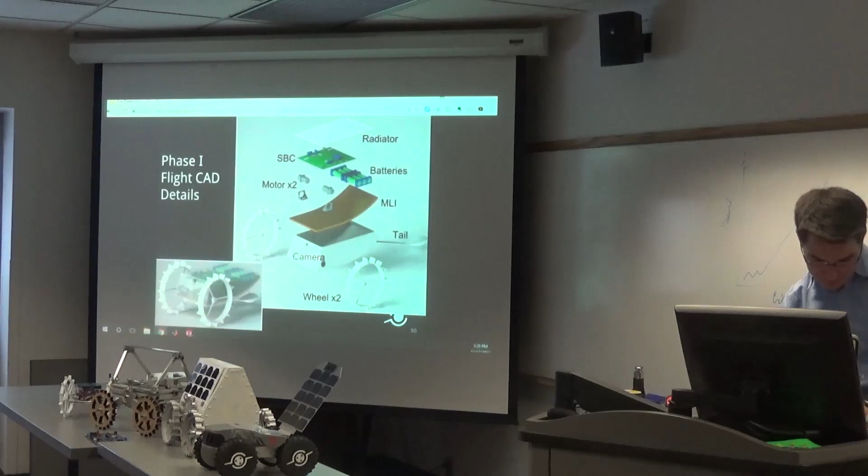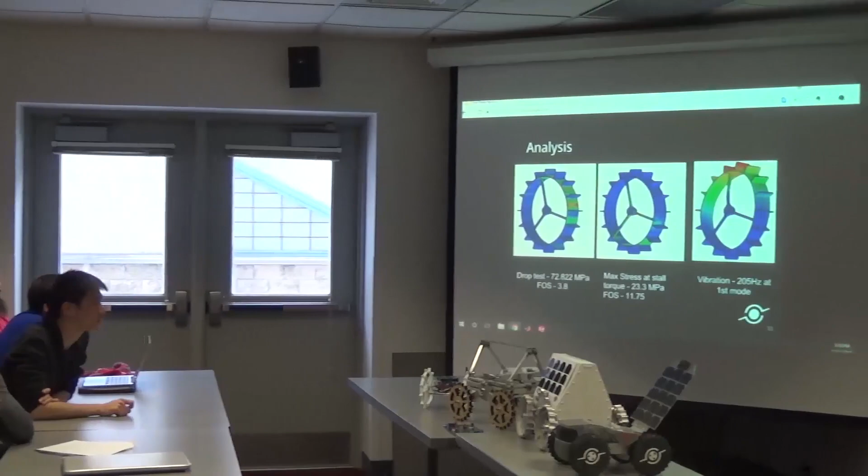Question: You showed lots of wheels - I don't know if you can go back to some of them - your designs had things like 3 spokes and 16 grousers. I won't go through all of them, but then you get around to prototyping and it's 5 spokes and 12. From the look of things, is there any rationale? The adage in all technology is never reinvent the wheel, and what you can count on in any robotics program is that it will constantly invent wheels - this one just looks like it hasn't quite gotten there. Response: Yeah, it really hasn't converged yet. Some of them are just wide rims with unknown numbers of grousers and spokes, and maybe not a good idea of how even the mechanics fit together.

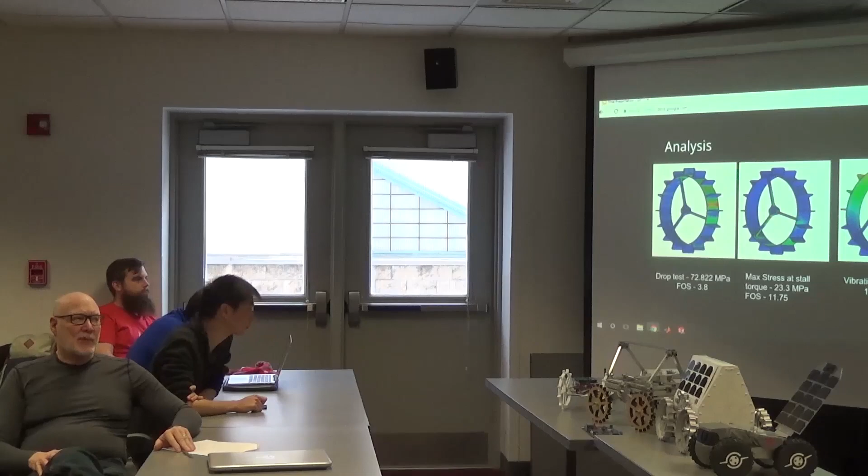Question: Somebody else - what material are these wheels, in your sim, in your analysis? Response: 6061. Comment: I'd just say something about materials - there was lots of mention about what's in the future, and if all were known, there's not much optimality of material in this. It's not quite designed or built like a watch. Even Carnegie Mellon, which pushes a lot of buggies around, uses carbon fiber, and there are likely to be more optimal structural prospects for this.

Somebody else? I actually think that's all the time we have for right now - there are people waiting outside.

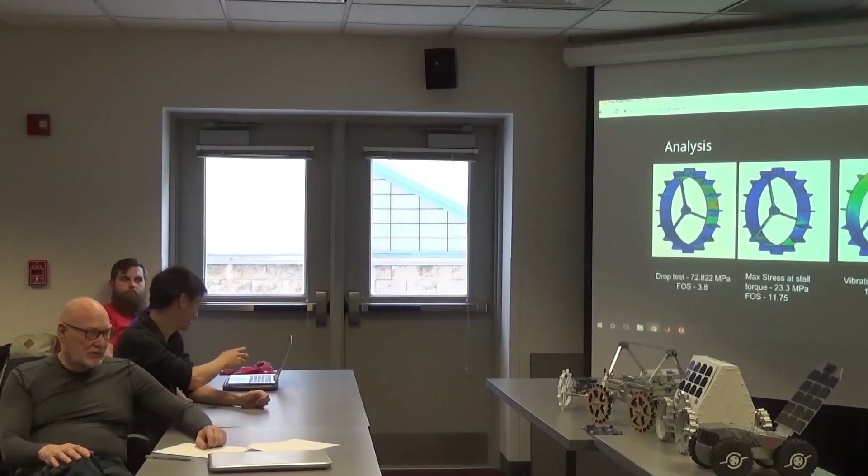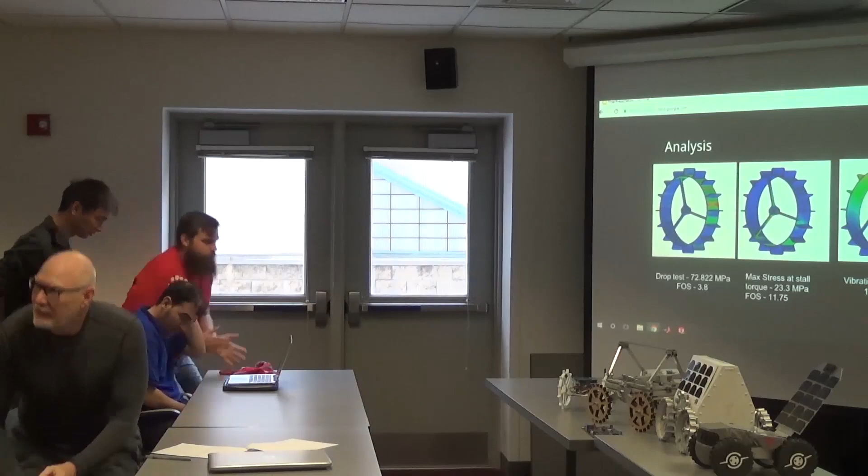Just to say - here's the thing: it doesn't get better, and that last voice that spoke up is quite a leader. We were so, and are so fortunate to have Andrew and to have all of us, and to be up to something that's worth being up to. Let's clear the room to be good citizens. Thank you for the year. Thank you for the outcome.